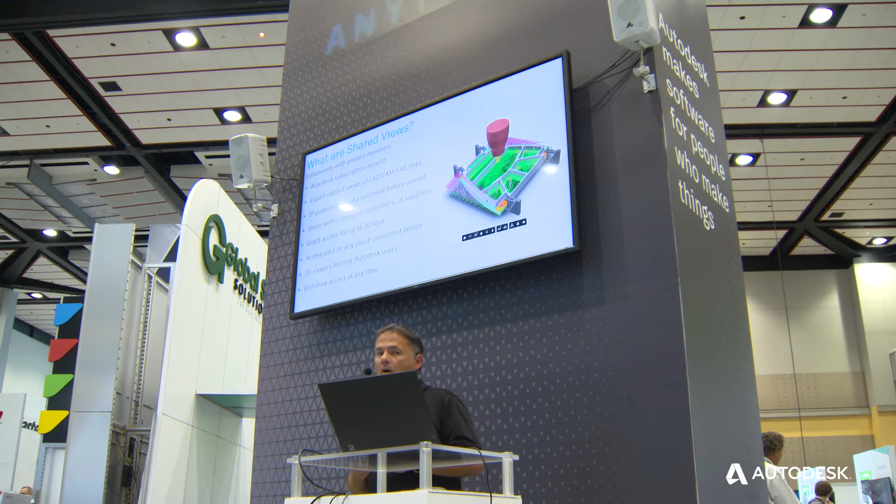Instead, what we do is we sanitize it and convert it into like a tessellated model. That means you don't have to worry about breaking your IP agreements with your end customers. And once your data has been revealed through shared views, you can share it with, as I say, colleagues, customers, suppliers, or anybody else who you would like to invite for an opinion and engage in that conversation.

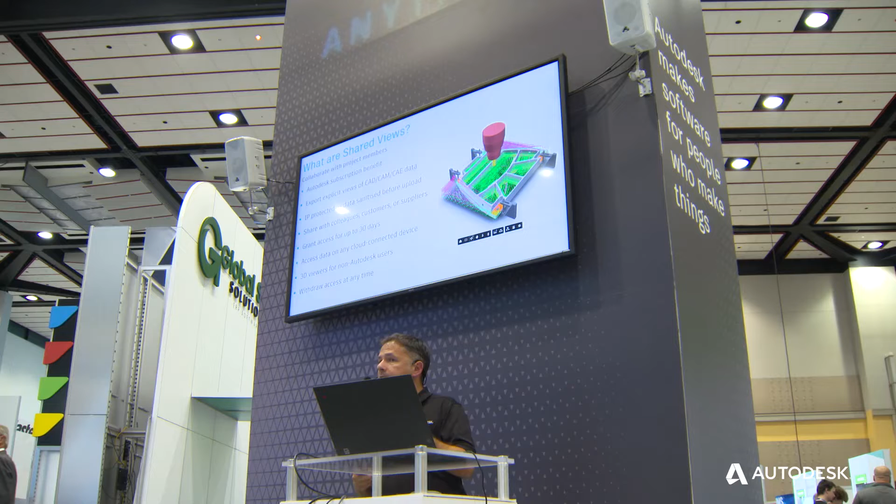And you can grant access to that team for 30 days or keep renewing that access to let that roll over and again. And as you'll see in a moment, using shared views allows you and your teammates and your collaborators to interact with your data in a 3D dynamic way. And at any time, if you need to, you can withdraw access from your team and return back to the state where only you can see the data that you're working on.

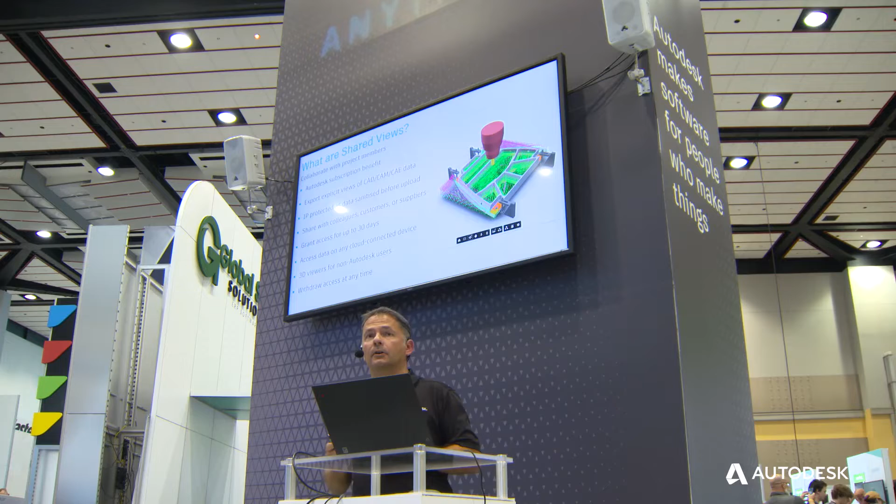So let's take a little look at shared views in action, and I'll walk you through a typical story of how shared views is used. So in this case, we're showcasing our Autodesk PowerMill software. It's CAM programming software. And the person driving the software has reached a point in time where they'd like to canvass the views of colleagues to discuss how this part is being manufactured.

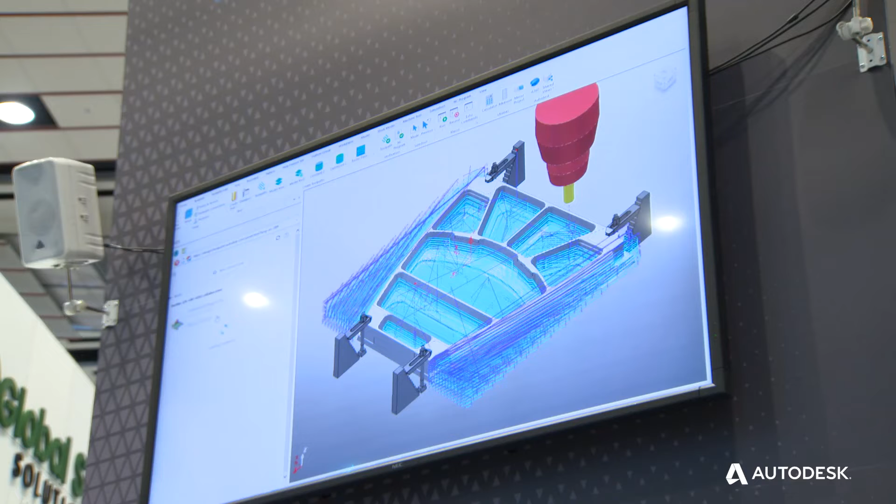And so we create a shared view entity. We give it a unique name so that we can differentiate it from any other shared view. And at that point, the data that's on screen at this moment in time is made available on the cloud. It's uploaded to the cloud, and I can now access that data, as you can see on screen, without having to have a subscription or a license to any Autodesk software. And in fact, I'm just using an internet browser and just browsing to a URL and looking at the data.

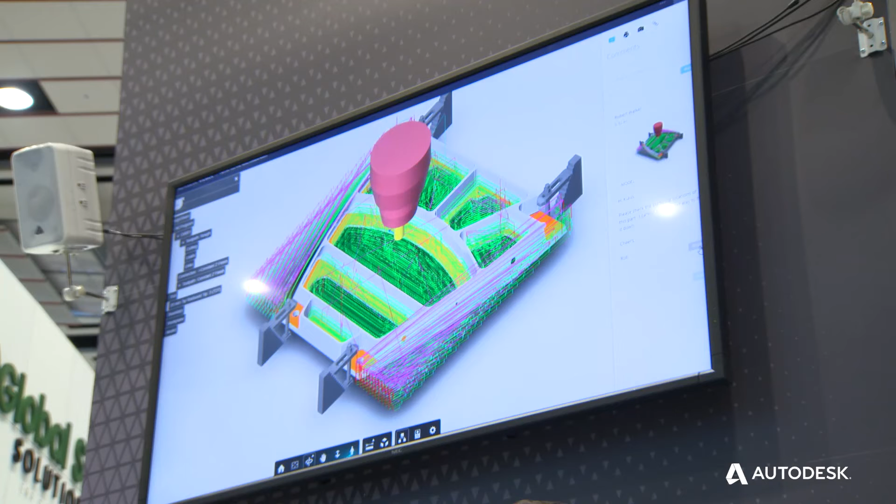So I can interrogate that model, I can spin it around, I can isolate key pieces of the geometry and really dig deep into that information. Maybe analyse the cutting tool, how big is it, what length flutes are we using, etc. Look at the tool paths, figure out what feed, speed, step overs and step downs are being used.

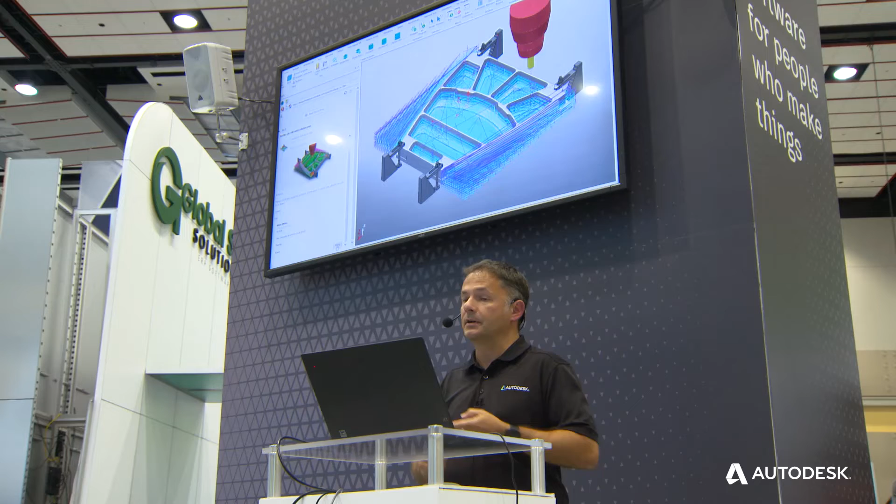And then I can share that data with my teammates, be it shift managers, machine operators, suppliers, customers, anybody that you want to canvas a view on. And then those guys can go and use their mobile devices, anything that's connected to the cloud, be it an iPhone, an Android device, a tablet or a desktop PC, they can log in and see that data in real time. What's really nice about shared views is that we can have a conversation.

We can use instant messaging technology to ask questions of the team that we're collaborating with. So I can say, hey, what do you think about this fixturing? Does this look good to you? And the person that I've asked can provide a quick and instant response. I could possibly even ask things like, where do you think I should put this fixture in? What tool should I use? I can really engage with my team and ask those key questions.

So shared views allows me to really interact with my team in a safe and secure way using the power of the cloud. Now the second technology that we'd like to talk about today is Autodesk Drive. Now whereas shared views sanitizes your data and shares a snippet of information for the moment in time when you're working on your data, Autodesk Drive goes one stage further.

And here, this is a cloud-based storage system that is secure, that allows you to upload the actual data you're working on, the entire CAD model assembly, the full PowerMill project data, the FeatureCAM model that you're working on, your PowerInspect reports that you're creating when you measure your components during the manufacturing process. So it is kind of like a Dropbox system, but boosted to support the kind of data that Autodesk engineers and customers like you are using.

It includes viewables, so you can load an IGES file into Autodesk Drive, and without needing Autodesk software, you can view that IGES file, spin the model around and really interrogate it. And as well as those native files and neutral CAD models, we can load in all of the Autodesk file formats that our products support, be it an Inventor file, a PowerMill project, and so on.

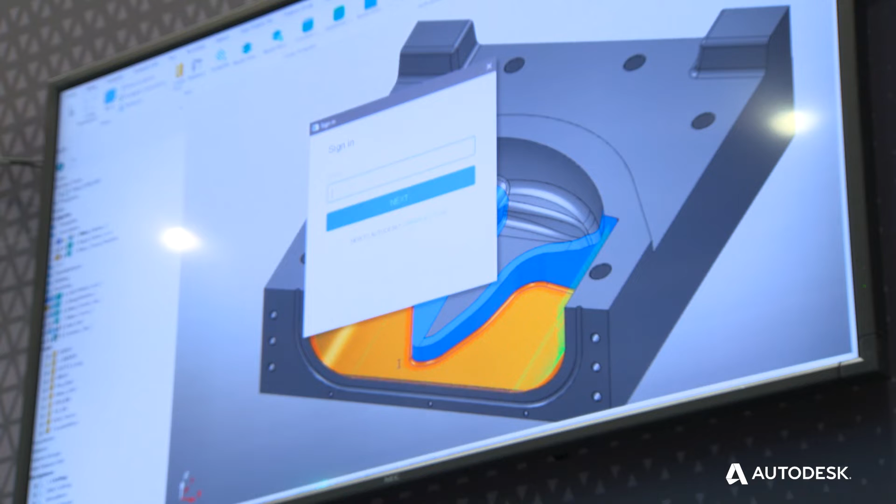It's a cloud connected device so people can use their mobile devices to actually interact with the data that's on Drive. On this occasion, we're using Autodesk PowerMill again. We've created a CAM program, a process that's going to drive the machining of this injection mold tool. And that data is then being uploaded to Drive, and we can see Drive appearing on screen now. Once the data is in Drive, we can manage it and organize it using folder structures, and then invite project collaborators to access the data.

Those project collaborators receive an invitation. Please look at my data. Please tell me what you think about it. Very similar to shared views, but they get access to the whole data set, not just a little snippet in time. And similar to shared views, you can see that the interface provides viewables.

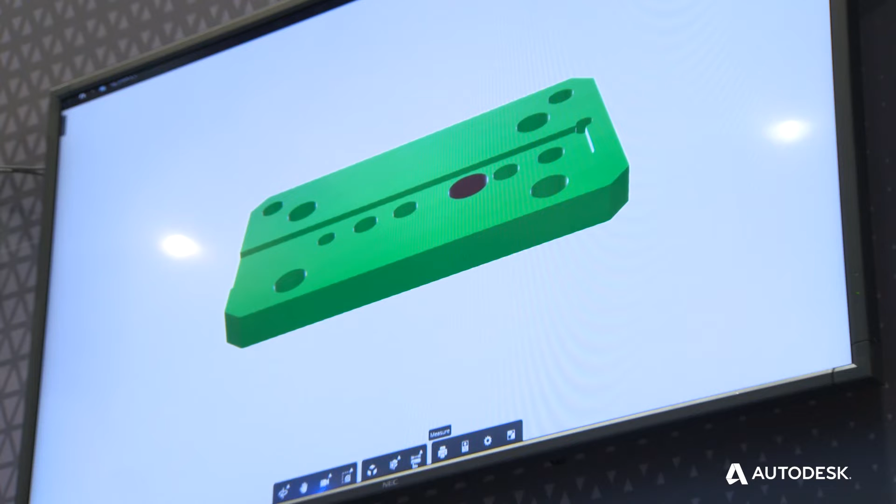So as you'll see in a moment, I can actually access the data, I see a little thumbnail of it, and then I access a 3D view of the component that I can interact with, I can spin it around, I can measure it, I can really dig deep into the information contained within that data.

So just to make it clear, shared views is a snippet in time. You want to collaborate with people and find out key answers to questions that you raise with them about that moment in your manufacturing process. Whereas Autodesk Drive gives those collaborators access to the entire data set that you've been working on at that moment in time. Now the third and final piece of technology we're going to touch on quickly, in fact, before we move on to that, let's look at a real-world example of Autodesk Drive in action.

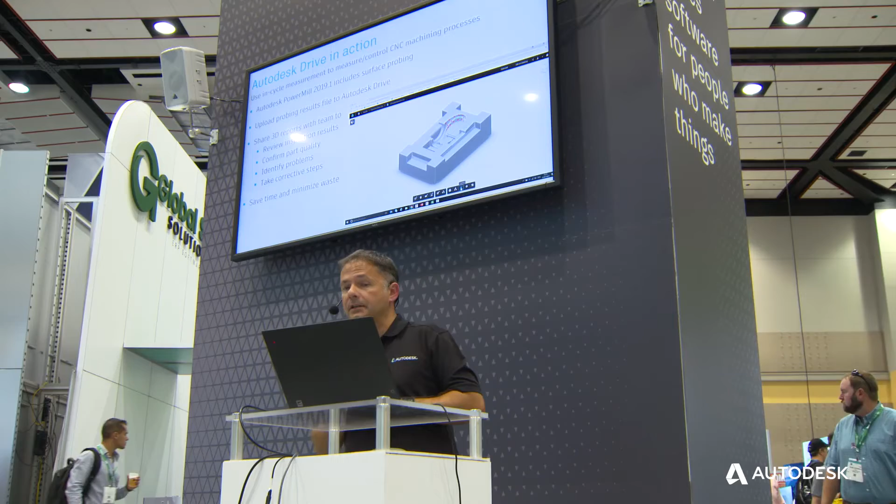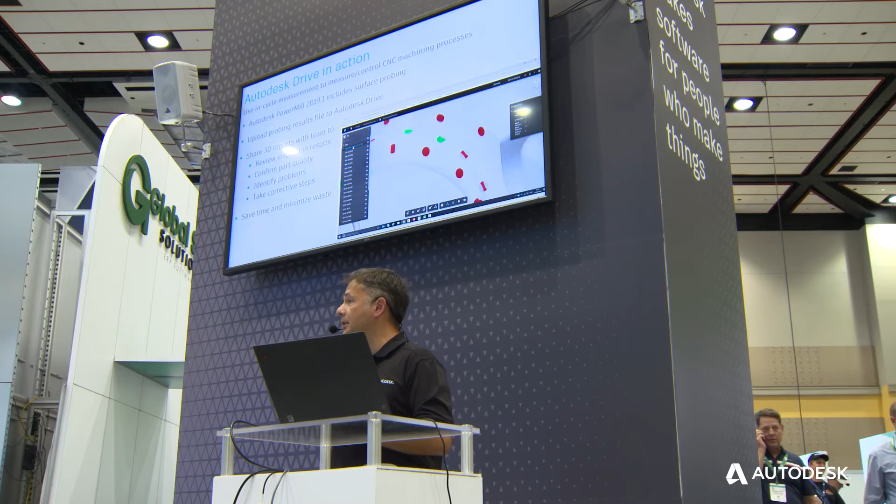So the video you see looping behind me is an example of Autodesk Drive displaying a metrology inspection report. So this is a situation where a component has been CNC machined, and then after the CNC machining process has been completed, we've used a spindle-mounted probe on the machine tool to measure key points on the component. And the coloured dots that you see on screen give me a representation of whether the part is good, in tolerance, or bad, out of tolerance.

And I can upload these inspection reports to Autodesk Drive and invite the quality control engineer, the shift manager, the customer and suppliers to review the data, and we can make a decision. In this case, this component has red dots all over it. It's not conforming, there's a problem.

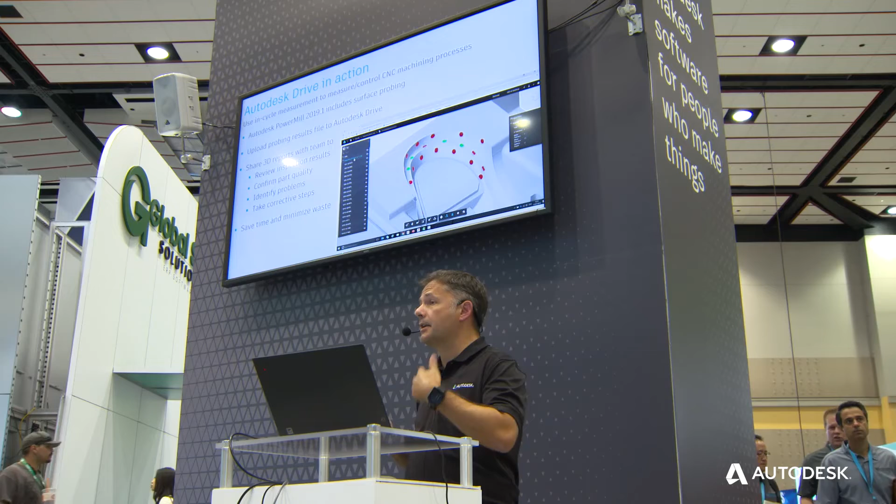And I can use Autodesk Drive to interact with my team and make a decision as to what to do next. It could be that the tool was worn and we need to run another cut to finish the component off. And so Autodesk Drive is instrumental, it's central to that collaboration interaction that we have with our teammates. And that allows teams to move away from using printed documents and emails and ad hoc conversations by the coffee machine and interact live and in real time through the power of the cloud.

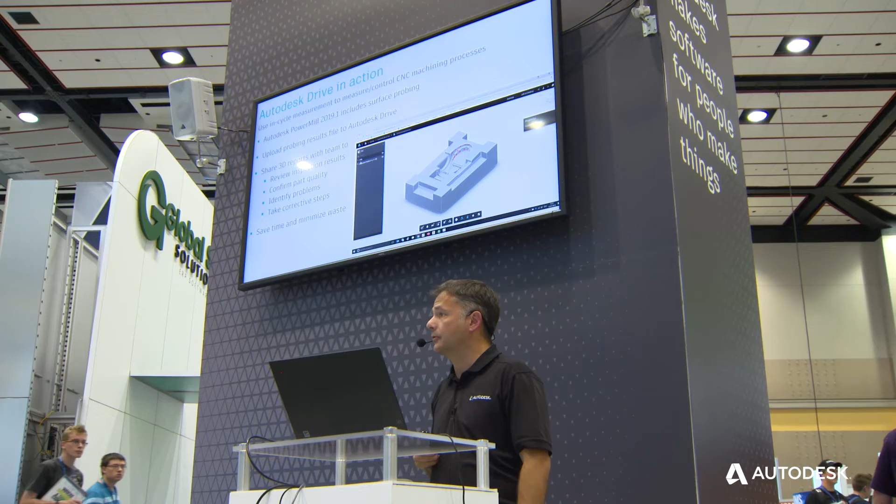So just to finish off, one third piece of technology that I'm really excited to talk about today is how we're using the cloud to streamline the management of CNC post processors. And this is something that we're calling posts in the cloud. So a CNC post processor, let's talk about what that is.

If you're familiar with CNC machining, CAM software generates a sort of neutral file that is not necessarily output for a specific machine tool. That outputting process uses a CNC post processor file. It converts CL data from the software to M and G codes that the machine tool will understand. And managing those post processors in a traditional fashion is quite risky. It relies on emails and exchanging files.

Managing multiple files and multiple revisions of files for different machine tools can be quite a burden on the administrator of your manufacturing teams. And so it's rife with the opportunity for mistakes to happen. If you've got two engineers using a CAM programming software and they both claim to be using the same version of the post processor, but those files are different, which file are you supposed to be using?

And if you get this wrong, you can have catastrophic side effects. You can effectively destroy machines, you can have some major problems occurring. So managing post processors for CAM software is error prone. If you don't do it right, you can have some major problems.

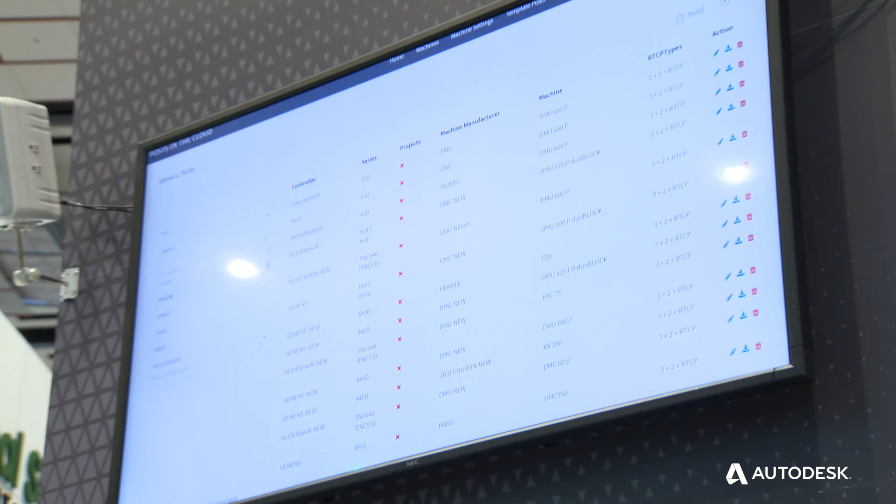The posts in the cloud solution approaches things very differently. We have a database of different post processors based on machine type. So machine manufacturer, whether it's a 3-axis machine tool, a 5-axis machine tool, is it a Siemens controller, a Heidenhain controller, Fanuc controller? All of those variables are accessible by the Autodesk team.

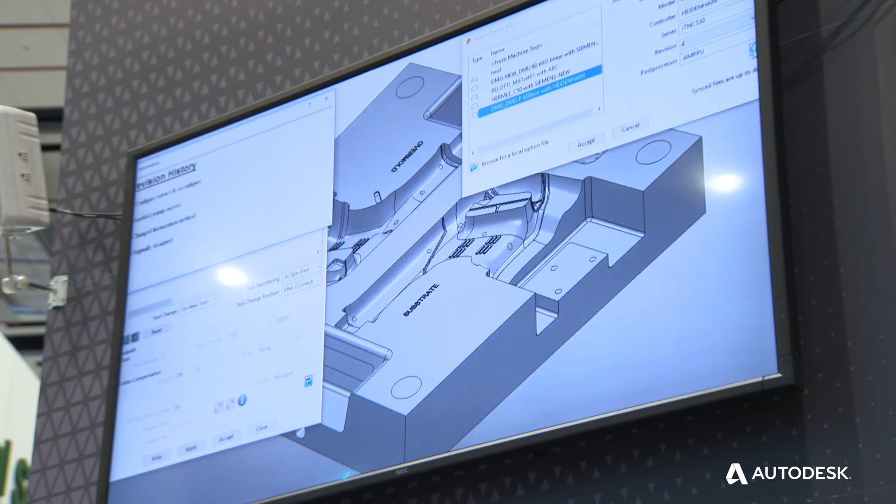And we select from that recipe the post processor that is suitable for your individual machine tool, and then we upload it to your posts in the cloud interface that you have access to. And then you, as an administrator of that system, can grant access to your PowerMill users. Once in the PowerMill software, I can access the post processor, find information about the make, the model, the controller type. I can access multiple revisions of it. So if I want to use the first revision, I have that option, or I can access the latest revision.

I've got complete control. And then once I select the post processor, we can output the NC program to the CNC machine tool and have confidence that we've used the right version of the file for the specific machine that we're looking to run. There's no questions. I am not using an out-of-date file, I'm using the correct file. So I've got 100% confidence that I know that that machine tool is going to be run safely and we're going to machine the components correctly.

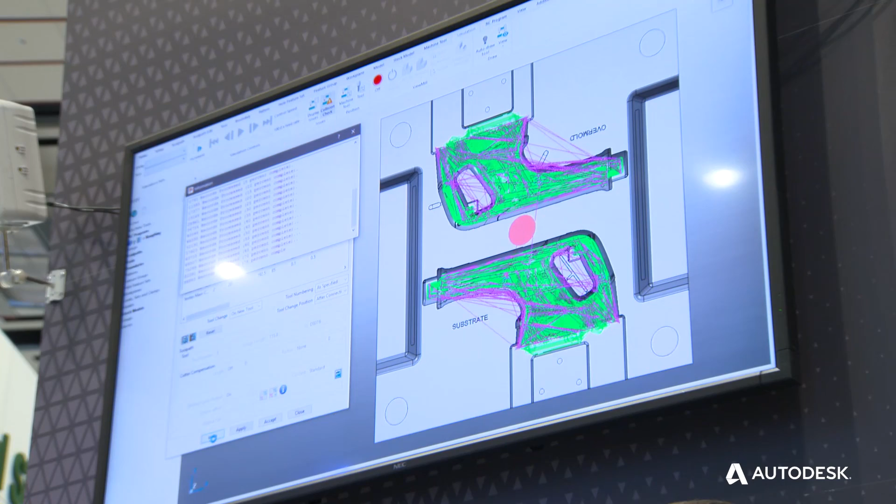And so to recap, we've shared with you today an insight into 3 pieces of collaboration technology. We've shown you shared views and how that can allow you to collaborate with your team, to share snippets, if you like, of your manufacturing process. We touched on Autodesk Drive and how we can use that to centralize the storage of our manufacturing data. And we also talked about this revolutionary new tool called Post in the Cloud. These collaboration tools really help your manufacturing teams be far more efficient, more joined up, and allow them to make anything.